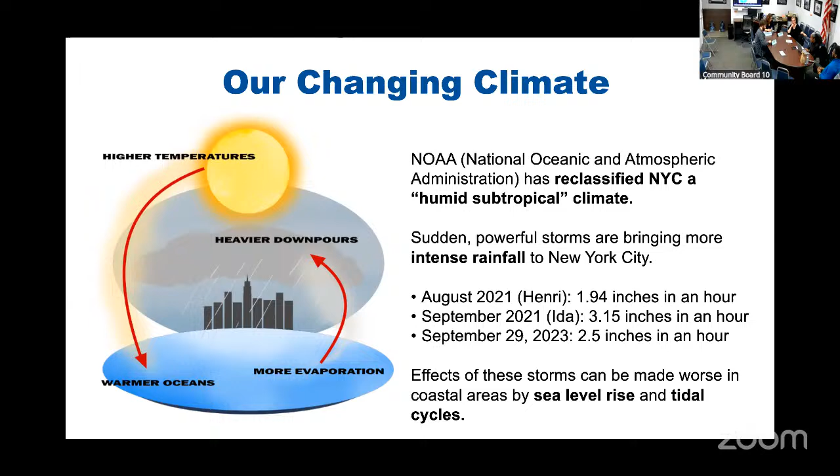The types of flooding that we're focused on at DEP, and that I'll review in this presentation, are three types. One is coastal flooding, kind of self-explanatory, flooding that comes from the coast and from being in a coastal community. One is stormwater, also kind of self-explanatory, talking about rain or things that come from above and how that can affect you.

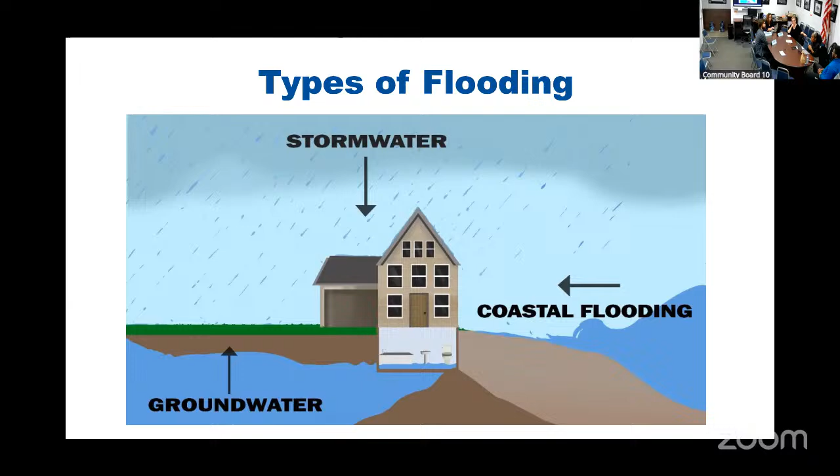And then the third is groundwater, which a lot of people don't know about, but all of New York City, most houses are set upon groundwater. So that means there's water already under your basement that, when agitated, can come up, either being agitated by the coast or stormwater. It's something we also look out for, and it's a third type of flooding.

The sewers, this is what DEP spends most of our time doing and what probably everyone on this call knows a lot about already. But believe it or not, in 98% of rain events, sewers are working and they are protecting us. It's these 2% of rain events that are extreme: Hurricane Sandy, Ida, and even less than that, even rainstorms that can happen every day.

The sewer network is built to handle about 1.75 inches of rain per hour. And some of those bigger storms we're talking about can go up to 2 inches per hour, even 3 inches per hour. So once you exceed the 1.5 to 1.75, that's where we get into hairy territory, where our existing sewer network is not strong enough to handle it.

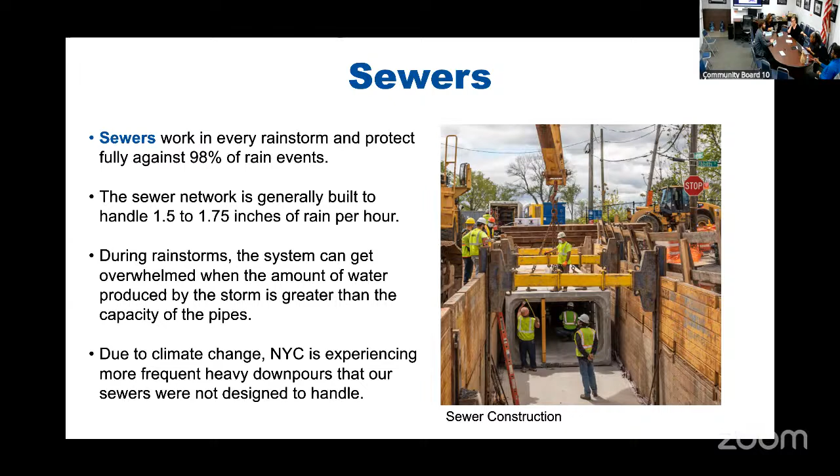And we can have sewer backups, which I'll get to in a minute. But basically, when our sewers are overwhelmed, it's greater than the capacity of the pipes. And because of climate change, because we've been reclassified, we're seeing increased amounts of this. So this is nothing new to New York, but we will see increased frequency, and that's important to note.

So really quick, I think I've been surprised by how many people know this and also by how many don't. So I just think it's important to talk about what sewer backups are and why they happen.

Most of New York City is combined sewers. I believe most of Community Board 10 is combined sewers. So what that means is storm water, the water that comes from storms, and wastewater from flushing your toilet, washer, dryer, and using the sink, that goes into the same place. On a dry weather day, when we're not having a storm, our sewers are more than able to handle the capacity of New York City and even increased development. What happens is we have a storm, increased storms, and storms of even more magnitude, and that's where we run into capacity issues. Because they're combined sewers, both of that can come up.

That floods catch basins, so it comes back into the street. That's one way of flooding, and it can also flood an actual owner's basement. That's where we really want to get involved by helping homeowners think about what you can do to mitigate that type of flooding, and also being on top of it and letting the community board and elected officials know that this is a thing that can happen. So we'll get a little more into what we can do about SBUs.

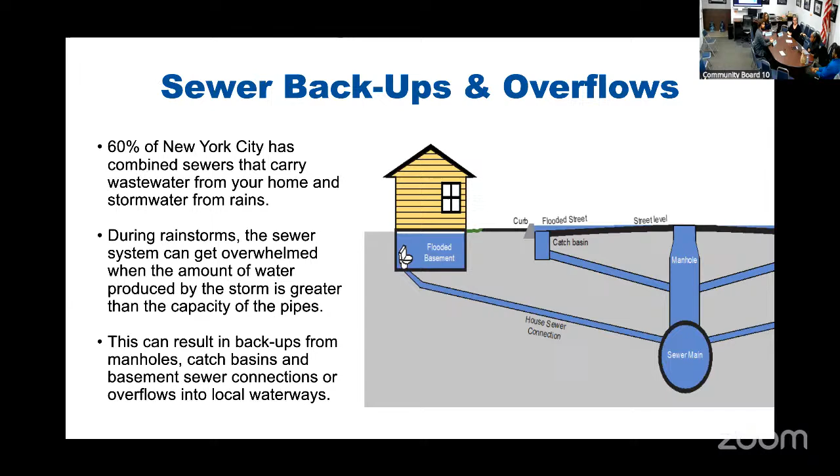We want to talk about groundwater flooding as well. Some areas in the city have naturally high groundwater, and after back-to-back storms or heavy rain, it can trigger groundwater, and that's separate from a sewer backup. DEP can help when there's a sewer backup. When groundwater happens, that's a hard thing to mitigate, and it's different. So if you email me and my response is 'this might be groundwater' or 'we're testing for groundwater,' that's what we mean by that. There's a bunch of things you can do as a homeowner about groundwater as well that we're getting to. But you can see it's a natural phenomenon of having a home on the earth and in New York, and it can get triggered by storms, but it's technically separate.

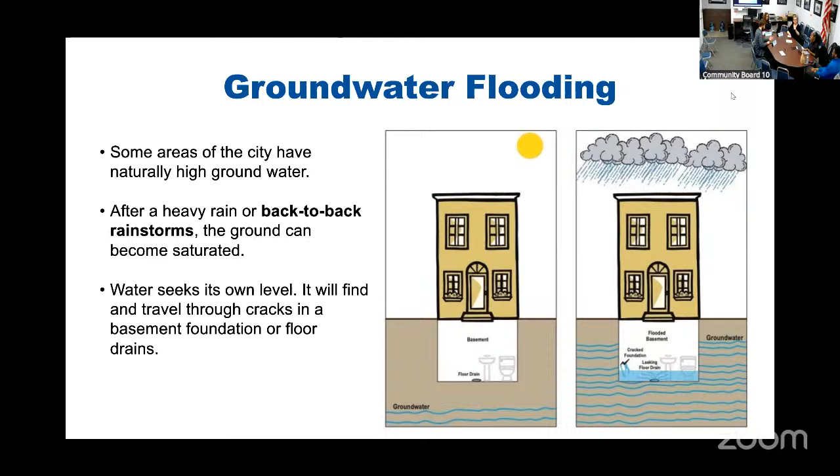And then coastal flooding, same thing—it can send water back up into the sewer system. This is an issue in a lot of community boards, and we have some big projects in Red Hook and other areas to mitigate this. These are the type of big flooding infrastructure projects where we build floodgates or flood walls. There's a big one happening in Manhattan now as well to mitigate tidal flooding. There's not a lot an individual person can do about that, but those are just the 3 types we're going over.

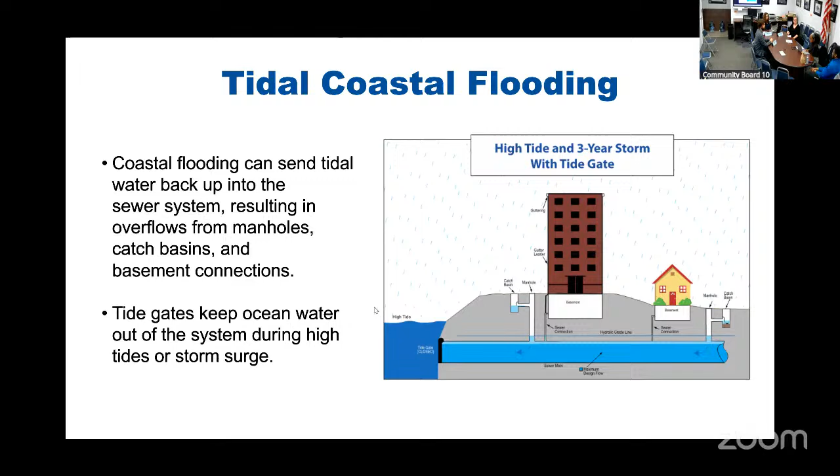So this is a video of coastal flooding just to show you how much of an issue it can be when it comes. This is from, I believe, Sandy, and you can see how far it can reach into a neighborhood if we don't have adequate walls, haven't raised the coastlines, that type of thing. So this is a real aerial image, and this is the type of work we're dealing with at DEP. When we have another superstorm Sandy, we want to help prevent these types of events.

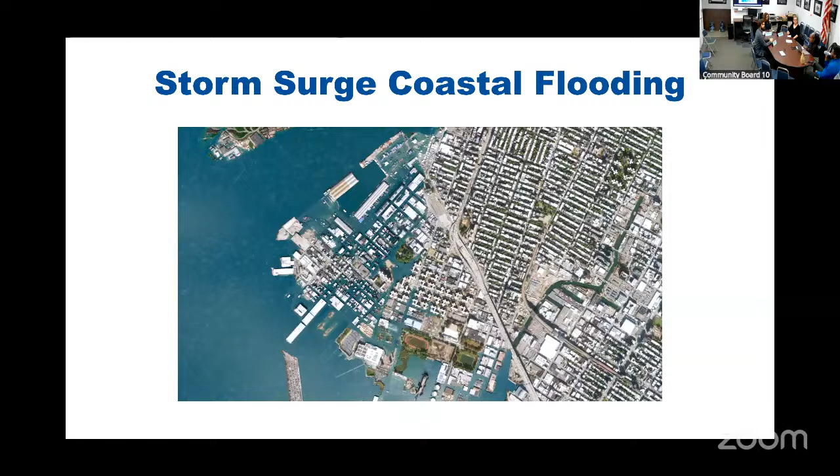So now the last one is hurricane season. We're trying to be much more—I don't know if you've seen this in some of the communications that come out—but we're trying to be very aggressive, and I'll get into this at the end of the presentation about things you can sign up for to be aware when a hurricane is coming, to be aware if you're in an area, which most of Brooklyn is, where we should be alert and proactive about hurricane season, and what DEP can do to know ahead of time about some of the problem areas and floods as they're happening in real time. This is a big issue over the summer into the fall, and it's something we're particularly focused on as well.

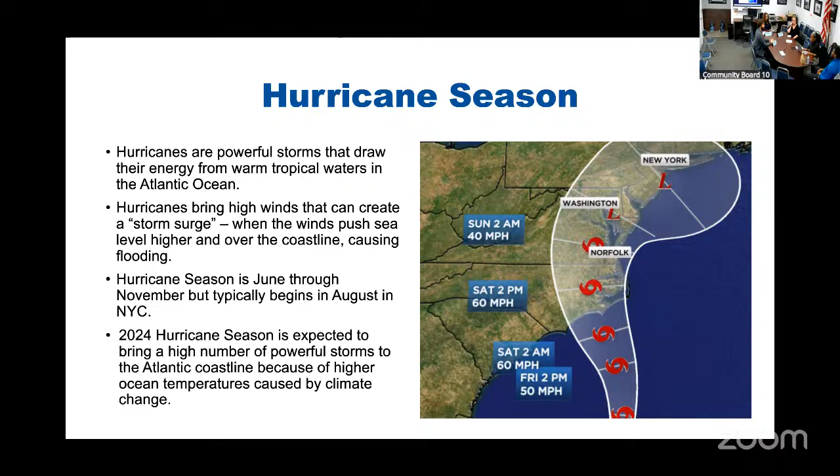Great. So now I'm going to go into what we can do to combat a lot of these things—talking about gray, green, and blue infrastructure.

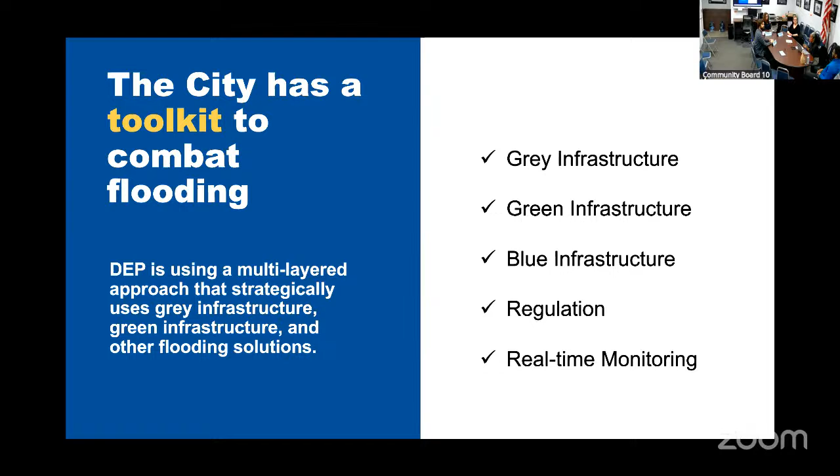And then how we kind of monitor these things in real time to see how we can divert our resources in real time to help homeowners and to help the community. So I showed this slide already, but it's just to reiterate, sewers are the first line of defense, and we have a 10-year capital plan. We're investing $8 billion over the next 10 years in sewer system upgrades. Not immediately in Community Board 10, but a lot of them nearby. And these communities are all interconnected and related to each other.

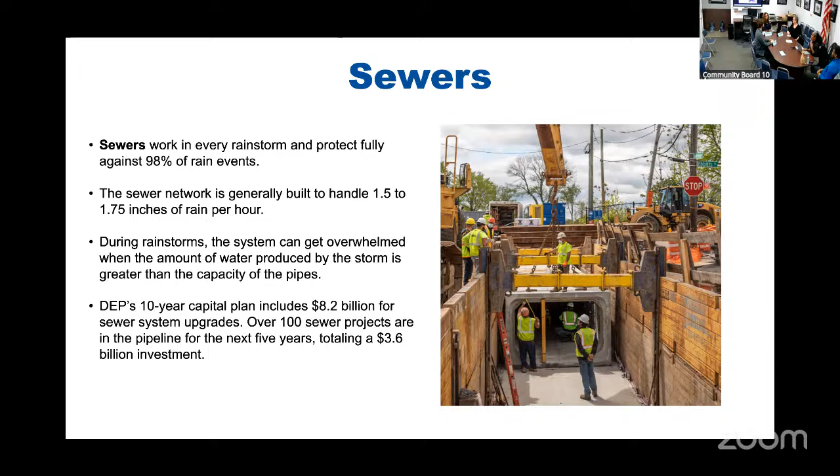So one thing I've been doing, and I'm happy to do, is see what, if any, capital upgrades we have scheduled in Community Board 10, and just kind of hear your guys' flags about areas you feel flood frequently or need upgrades and investment.

Green, darn it. Can we pull it up for... Okay. We lost Tara. Okay, yeah, let's see. Hold on. I can keep talking about green infrastructure while we get it up and running, and apologies that my computer died.

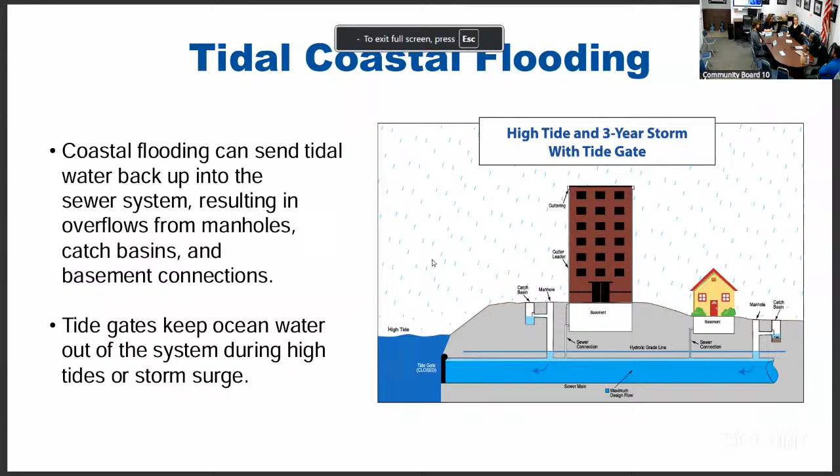Great, amazing. So green infrastructure, as folks may know, is like rain gardens, porous pavement, and these are like smaller infrastructure investments we can make in communities that really help with mitigating stormwater. So rain gardens, we can build them on the side of the sidewalk. They can also be built in the middle of a street. And then porous pavement, same thing. We can replace concrete, which doesn't really take in water, with something called porous pavement that does. And these are really important ways that we want to use in addition to the sewers.

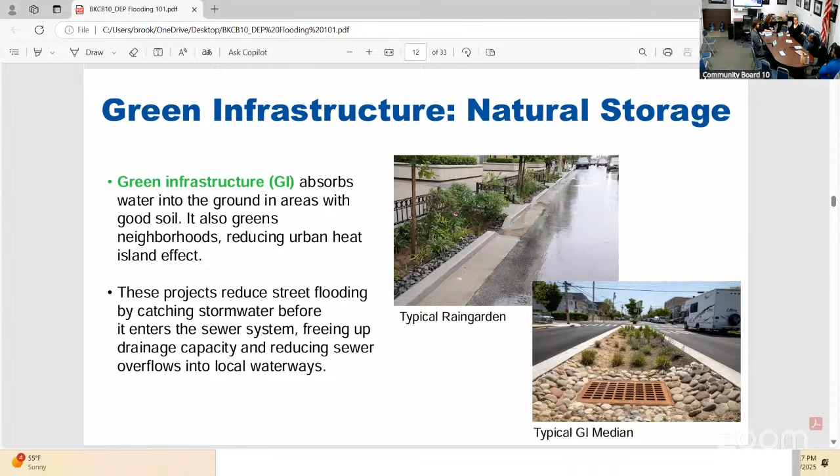So you can go 2 slides from here. There you go. We have built a ton of these around Brooklyn. There are a few in construction on the side area of Community Board 10, but I didn't see too many. But I'm happy to go back and look through what our GI investments are in the area, but they help reduce heat and they help take water in. So they're kind of another big line of defense we have in addition to the sewers themselves across the city. You can go to the next slide.

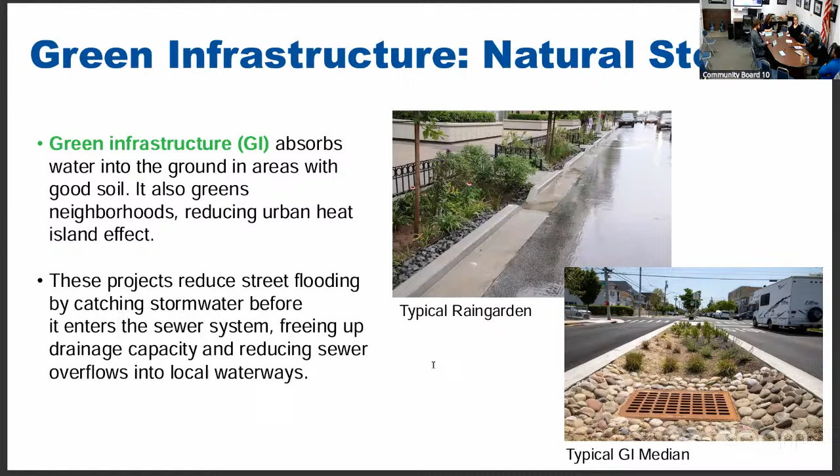So porous pavement, which I talked about a little bit, it's a special roadway paving that's designed to absorb water. We're adding 35 miles into Brooklyn. I don't know exactly where, but I can come back and get you guys some more information on that. But porous pavement is great because in areas where we can't put in a rain garden for one reason or another, we can put in this pavement and it can help be another line of defense. You can go to the next slide.

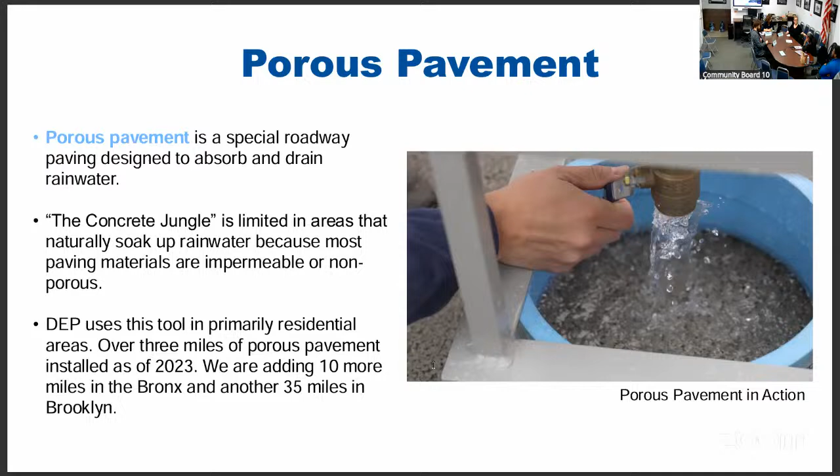I see it. Okay, so FloodNet sensors, we've invested 7 million in so far, and we have 500 across the 5 boroughs. I'm working really hard to get more in Brooklyn. We do not have as many in Brooklyn, I think, as some other boroughs, but what these do is they can tell us in real time what streets are flooding and what sewers are flooding.

And that's great because we do have a field team. There are 2 field offices that they get deployed from in Brooklyn. And so if we know ahead of time where an area is becoming overrun, we can send them there quickly, as opposed to waiting for 311s, waiting to get information from elected officials and community boards. We lose precious time. And so these sensors are very exciting, and we're in the process of putting a lot more up. You can go to the next slide.

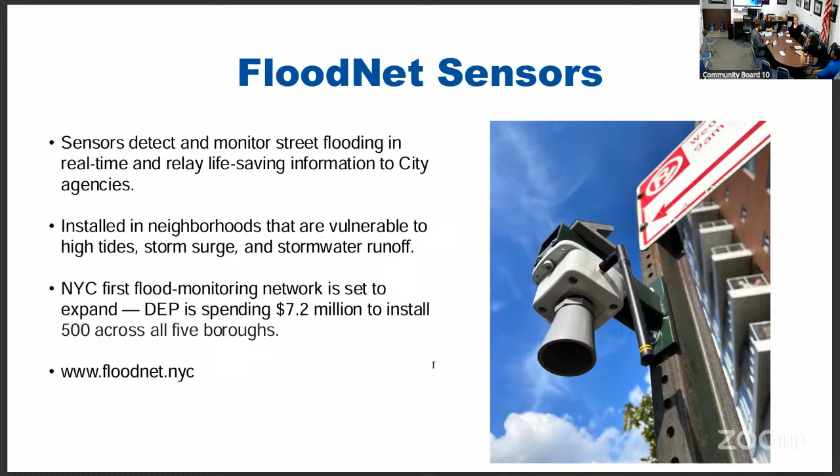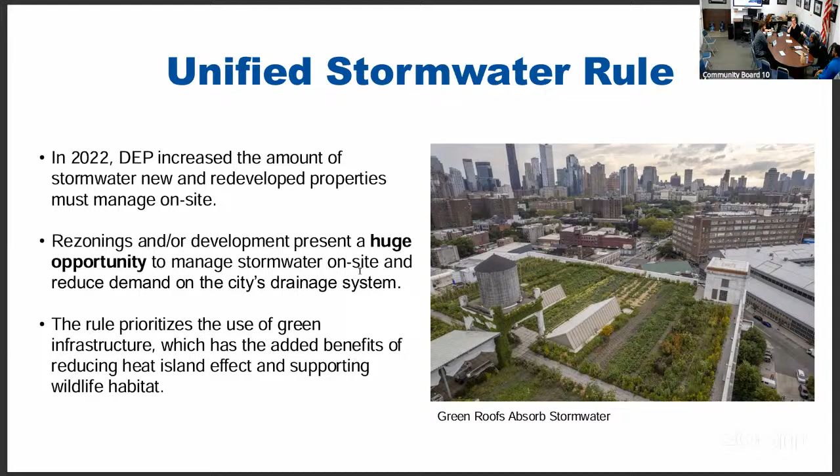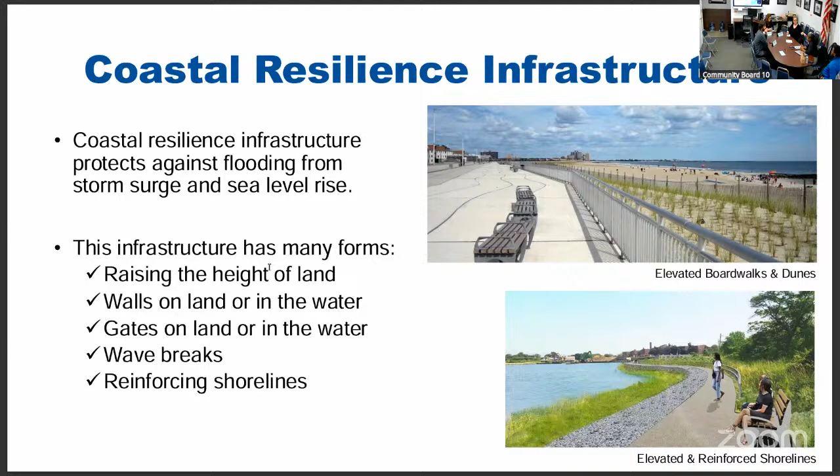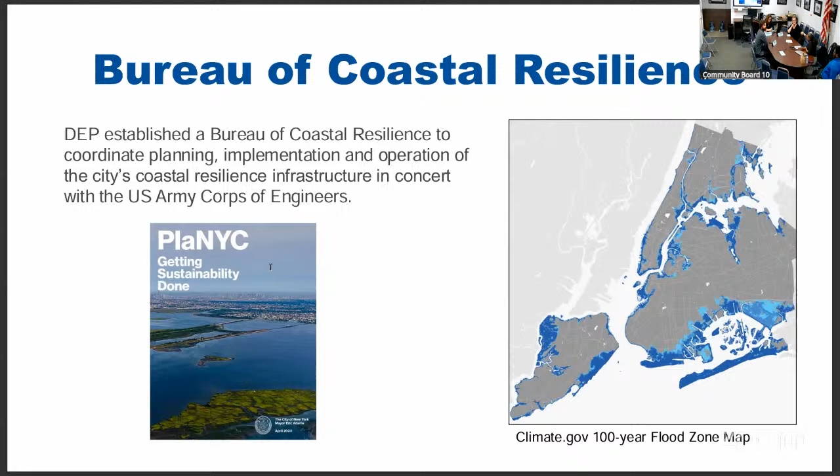If you go to the next slide, you can see we have a new Bureau of Coastal Resilience. So working with the U.S. Army Corps of Engineers to really think how we can reinforce our coastlines. And a lot of that is Brooklyn. I can just tell you in my 6 weeks working here, I've been or asked to be on a lot of calls with these folks because it's an issue that affects Brooklyn just as much as it does Manhattan, Queens, and the Bronx. So this new Bureau will continue to work on this effort and figure out how to fortify our coasts. You go to the next slide.

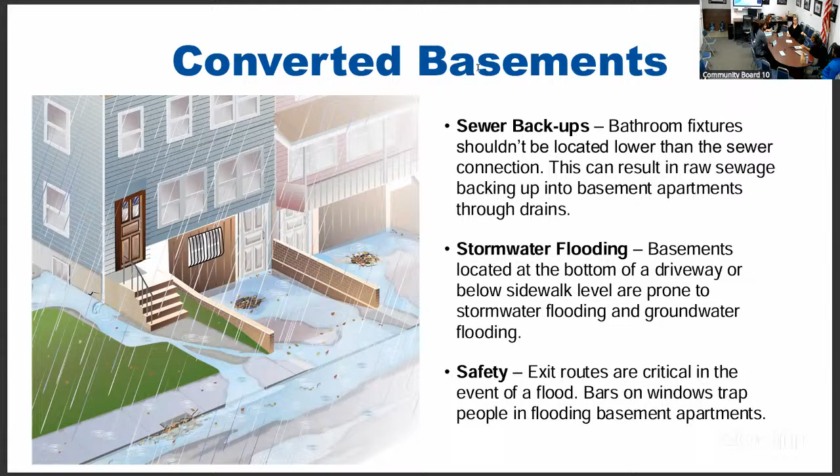First is really educating folks about their basements and making sure your basements aren't illegal, like they're correct. And doing everything you can to update your basement, even if it is following all the rules, to make sure that it can mitigate stormwater in the best way. So base level things, like bathroom fixtures shouldn't be lower than your sewer connection. If there is a sewer backup, that means that sewage could come up into your bathtub or your toilet or your sink. And so where your bathroom fixture is located is very helpful.

Basements that are below a sidewalk or a driveway are extra prone to flooding because of where they're located. And also making sure you have 2 exits, that there aren't bars on your windows. Those things from a safety perspective are really important because flooding can happen very fast. And so if you do happen to have a basement that is situated this way, it happens really fast, you have bars on your windows, you can get into a very tough situation there. Let's go to the next slide.

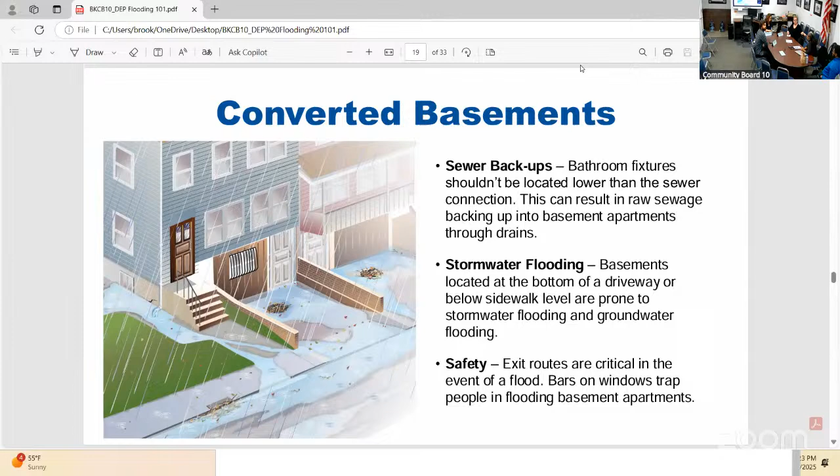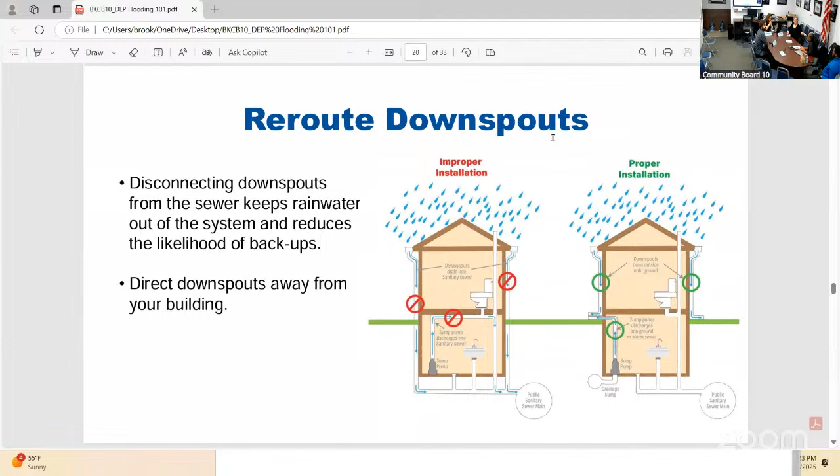Rerouting your downspout. This is another thing that we've been asking folks to do. If your downspout is located in a way where it's easy for rainwater to go back into your home or to go down into more vulnerable parts of your building, that can increase the amount of stormwater that floods into your basement. Whereas if you put the downspouts so they're pushing outwards or they're up above your basement, that can create better stormwater management from the homeowner's perspective. Go to the next slide.

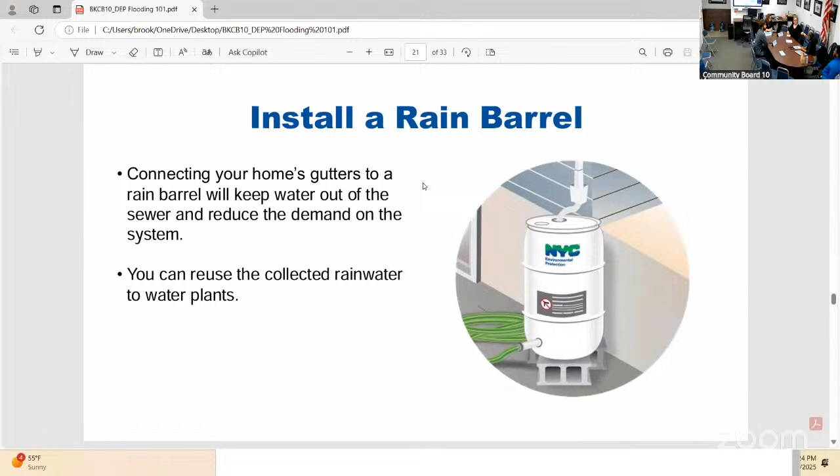And if everyone had one of these, the barrel would collect water first before it goes into the sewer. And we as a city would be protecting a little bit of our capacity. So that's something that we encourage folks to get and install. You can go to the next slide.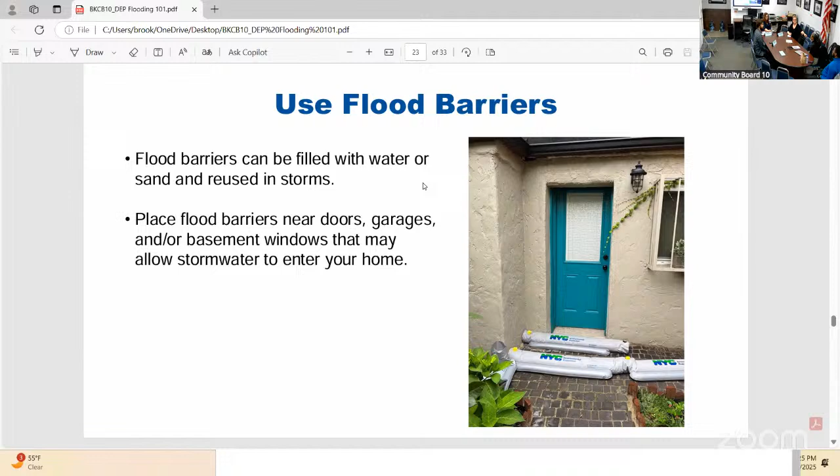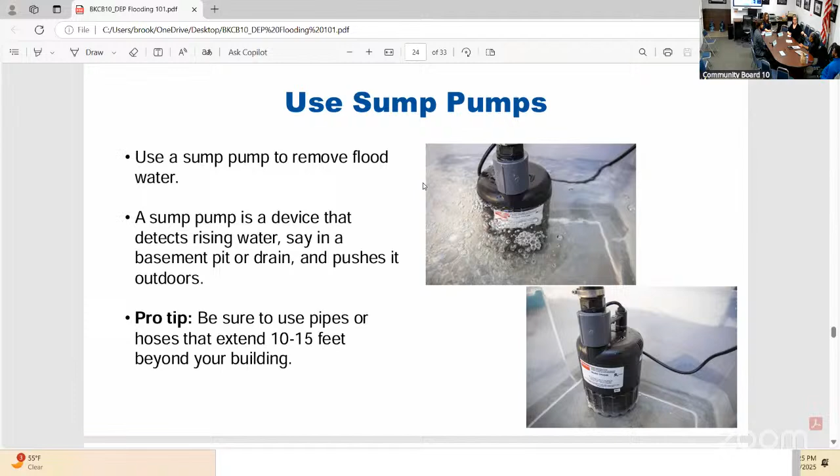Sump pumps: we hope to do some events, and we'll let the community board know this summer, where the city will provide some sump pumps, but you can also get them at a Home Depot, and you can put them in your basement. If the water rises above a certain level, they can help pump the water out. These are really, really great to also mitigate flooding when flooding events happen in your home. You can go to the next slide.

Great, so these next few slides are just best practices that help us as a city not overrun our sewers when these events happen. One is waiting to use water. So, massive rainstorm and you decide right now I'm going to do all my laundry from the week. Maybe hold off on that because it's all going in the same place because you have a combined sewer. So if everyone decides to do their laundry at the same time, plus the storm happening, that's when we get these backups in basements and flooding on the street.

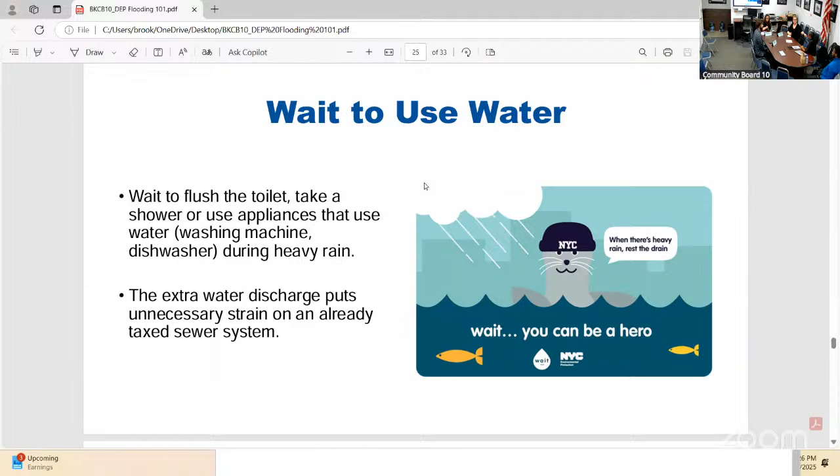So waiting to use water is something I did not know before I started this job, and it's a little way you can help contribute in these special events. And then we can go to the next slide. Thank you so much, Josephine.

Trash it, don't flush it. So the city spends $18 million a year dealing with folks who put the wrong thing in the toilet. I can tell you for 6 weeks, I've been dealing with this already. There's no such thing as a flushable wipe. They all say flushable wipes on them in Duane Reade and CVS, and it drives me nuts now because I know it's not true. So please don't put these things in the sewer. It increases the likelihood that there'll be a backup in your community, and makes it tough for everybody. You can go to the next slide.

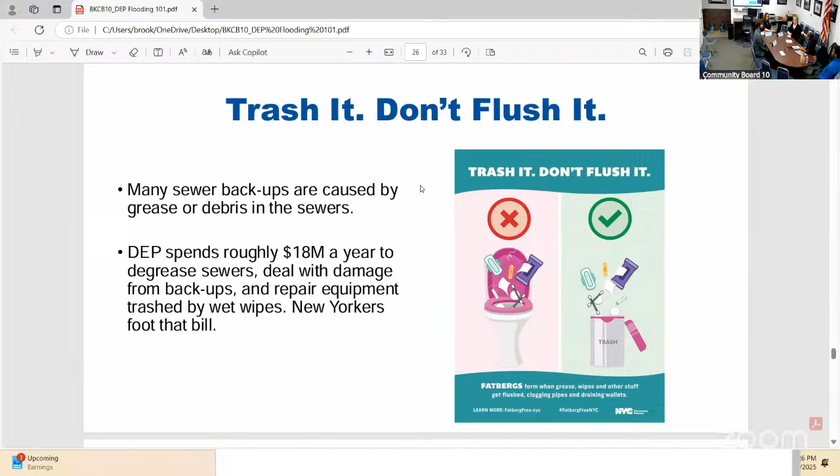Here we're going to talk about flood insurance. One is just flood insurance for your home. Not every home in New York City is eligible for flood insurance, which is frustrating. But we do encourage folks to check if you are, because if you are, it changes the game if something happens to your home. These incidents can be $50,000, $100,000 worth of damage. So you really want to make sure you're insured. And even if you're a home that doesn't usually flood, like I said, New York was reclassified. These storms are increasing in intensity. It could be yours. So making sure your home has flood insurance is very important.

If you go to the next slide, this is insurance specifically for your sewer service line. And this might not even be a flooding incident. A lot of the sewer service lines in New York City are very old. Some of them are lead and need to be replaced. And so if you get insurance for your service line, it's like $15, $20 a month, and it protects you from when you might have to change your sewer service line. That's about $10,000 on the individual person. And we see it happen all the time.

It could be the service line has just been a long time and wasn't replaced. It could be your neighbor's service line got messed up and it affected your service line all of a sudden because of groundwater or something. So it could be no fault of your own. But if you don't have this insurance, it ends up being a lot of personal expense. So I believe DEP actually sent out mailers to homeowners about this recently, really encouraging folks to sign up for the service line insurance, which is separate from flood insurance because it's not technically a flood, and it can help you with that big expense. And this is an example of someone with a broken service line and having sewage back into their bathtub.

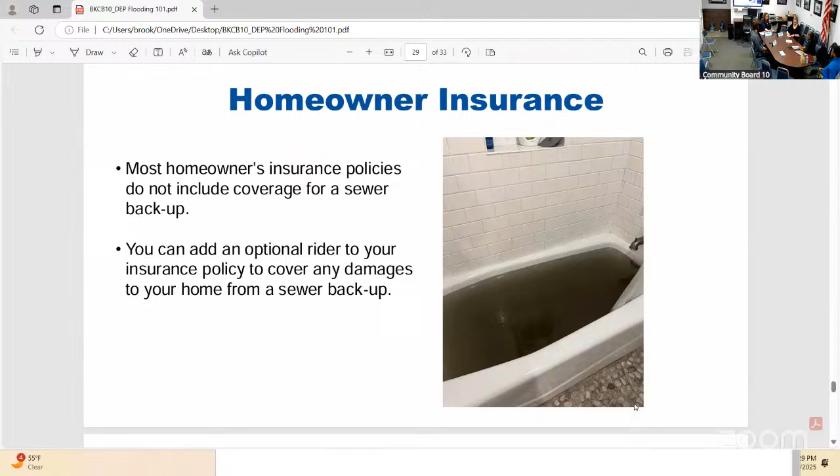So your evacuation zone is good. This affects certain communities more than others, but we put this on everyone just because knowing your plan ahead of time is important: if there is a crazy storm, if the flooding reaches a certain area where you can't be in your home, it's important to know about that. And I'm happy to come back with more detail about that for Community Board 10 if that's something that would interest you all. It's the last resort, obviously, but it's just important to know these things.

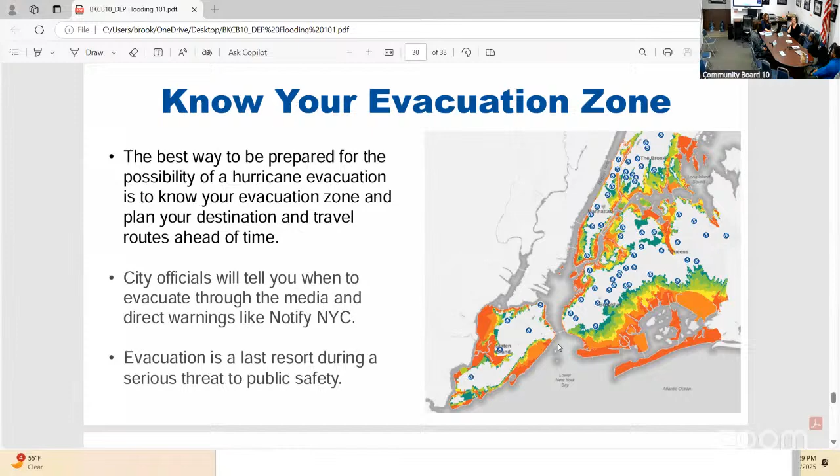I believe that's the last slide. Great. So we can go back to any of the slides if folks have questions. I know I went through it fast. And then also happy to answer any of your other DEP related questions. Even if I can't answer them, Denise and I will take them back. And thank you for listening to me babble for a long time. Thank you. So I'll stop share.

Thank you. That was great. So we could see everyone. Does anyone have any questions from Zoom? I have a question. You have a question? Oh, sorry. Elizabeth has a question. You could go first. Okay.

So, and I'm sorry, I delved into this a lot after our tour of Owl's Head, which was so helpful. But one of the things that was really shocking to learn was that we have these combined sewers where there's formaldehyde and things coming from all of the funeral homes and all the medical waste, including blood, and then all the restaurant waste, like cooking oil, is all going into the sewer system. And so one of the things that I started to look at is, does that mean that if your sewer backs up, that stuff is coming into your house? And I was wondering, given the increased likelihood with climate change, the rising groundwater, and the increasing frequency and severity of the storms, is DEP thinking about doing anything to maybe limit it?